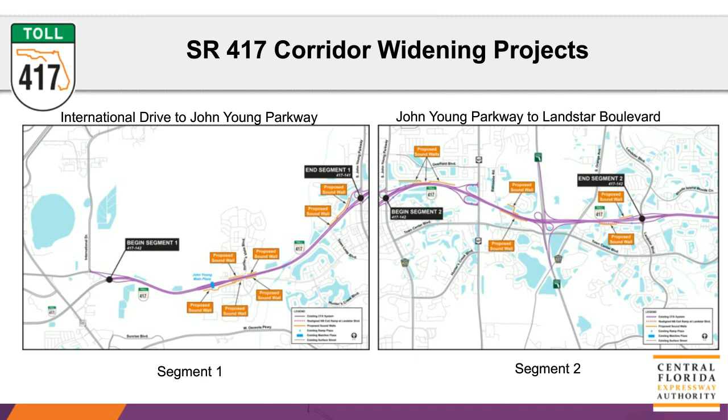Both segments include widening State Road 417 from 2 lanes to 3 lanes in each direction. CFX is also adding wider median shoulders that can temporarily accommodate additional traffic during emergency response events, such as traffic accidents or hurricane evacuations. Each segment also includes several proposed sound walls. During design, a noise study following state and federal guidelines is conducted to determine noise impacts associated with the expressway widening. The study identifies noise-sensitive sites such as homes, schools, churches, and recreational areas along the project corridor.

For these projects, sound walls have been considered for areas predicted to experience noise levels that reach or exceed 66 decibels, or experience an increase of 15 decibels over existing noise levels. Additionally, the sound wall must provide at least a 5 decibel reduction to be considered feasible. 66 decibels would be slightly louder than heavy traffic 300 feet away. 15 decibels compares to the noise you would hear at night in a rural area, like the sound of crickets. There is also consideration involving the cost per benefited property.

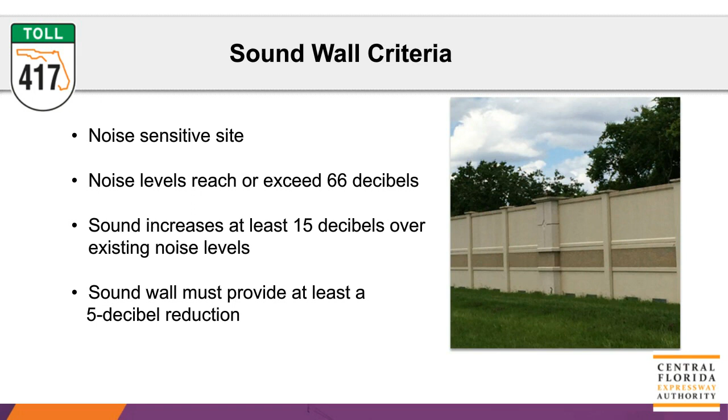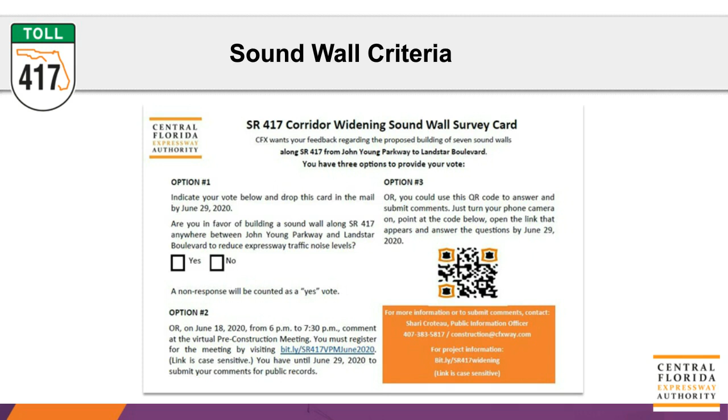We've posted the traffic noise analysis on the State Road 417 Corridor's Widening Project webpage. Please review it for details or contact us with questions. Now, let's review those proposed sound wall locations for the two widening segments.

Construction on the first segment from International Drive to John Young Parkway is expected to begin in early 2021 and is expected to be complete by late 2023. In addition to the widening, there are 7 proposed sound walls along this stretch of the expressway, as shown here by the orange boxes on the map.

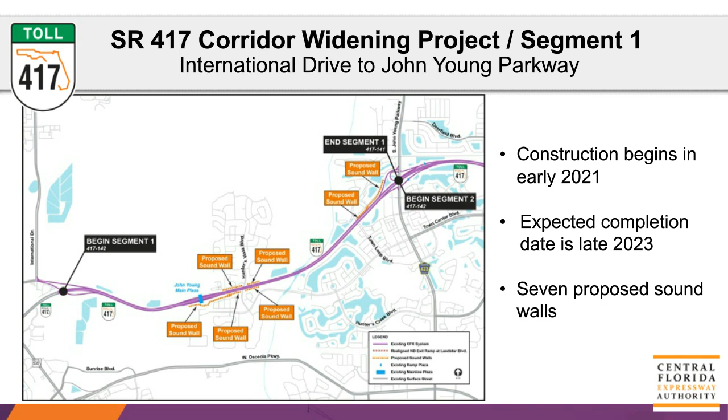This aerial map shows the sound walls proposed at Westshire of Hunters Creek. Wall A, a 22-foot tall wall along northbound State Road 417, would be located near the right-of-way line, behind the John Young Mainline Plaza. It runs a little more than 2,400 feet, nearly a half mile, behind the Westshire neighborhood. Wall B, also behind Westshire, is mounted on the shoulder. It runs 700 feet, or just over a tenth of a mile, to Hunters Vista Boulevard. This wall is 14 feet tall.

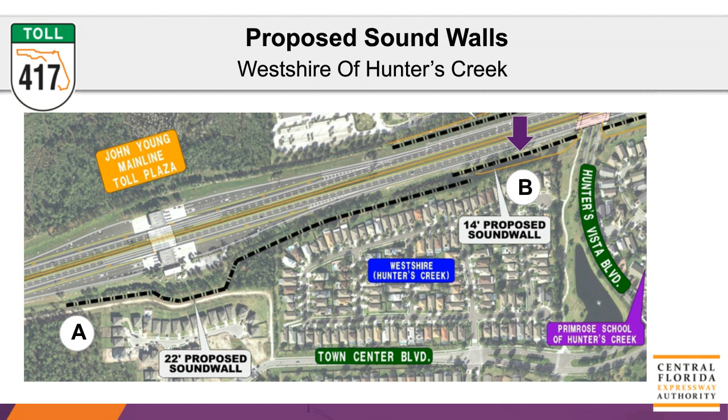This aerial view focuses on the proposed 14-foot tall wall shown at the top of this map. This is along the southbound side of State Road 417 near Terra Vista at Hunters Creek, just west of Hunters Vista Boulevard. This wall is mounted on the expressway shoulder and runs 995 feet, less than a quarter mile, to Hunters Vista Boulevard.

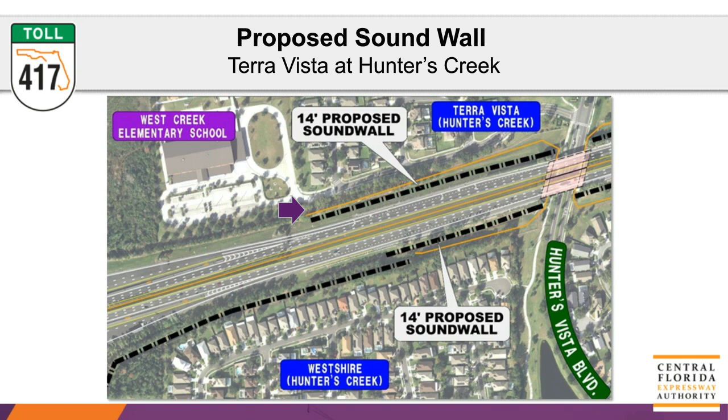This map takes a closer look at the sound walls proposed near the Hunters Creek neighborhoods east of Hunters Vista Boulevard. Wall A is a 14-foot tall wall behind Raintree at Hunters Creek. It runs 528 feet, or a tenth of a mile. Wall B, also 14 feet tall, is located behind Mar Vista at Hunters Creek along southbound State Road 417 east of Hunters Vista Boulevard. It's 739 feet long, a little more than a tenth of a mile. Both of these walls are mounted on the expressway shoulder.

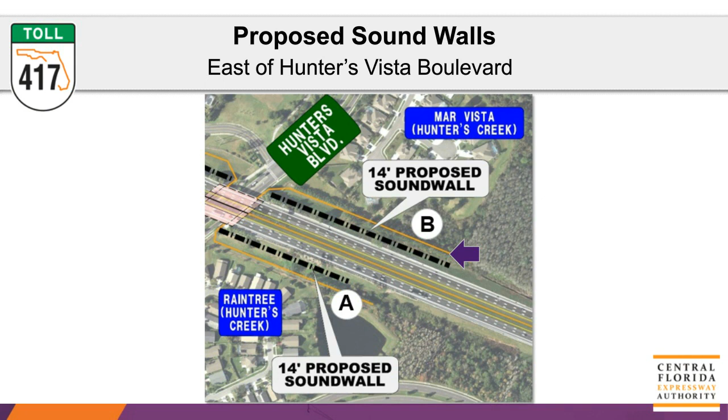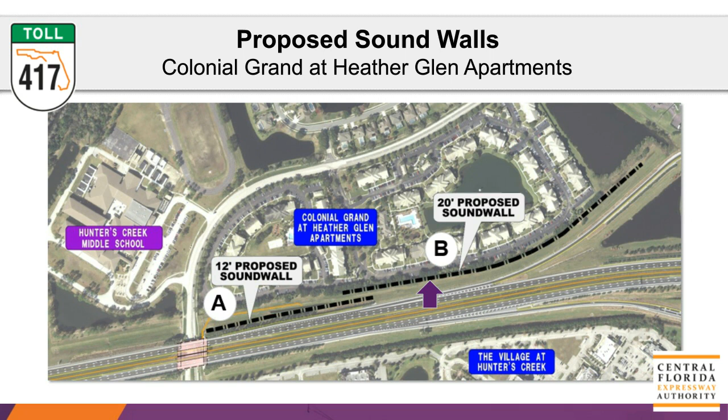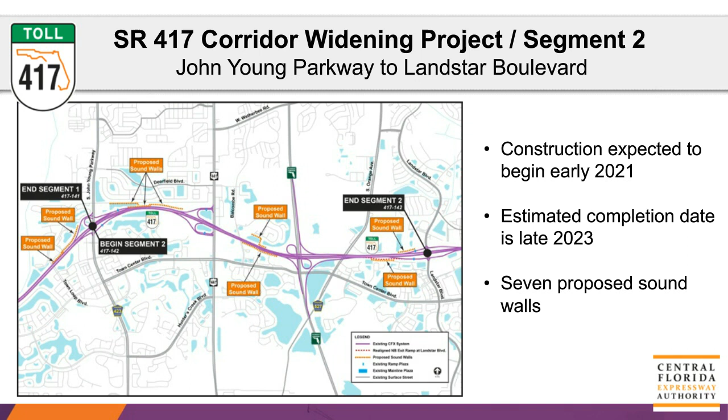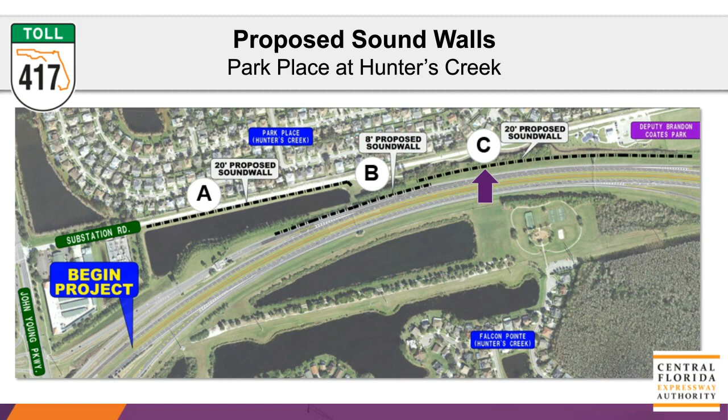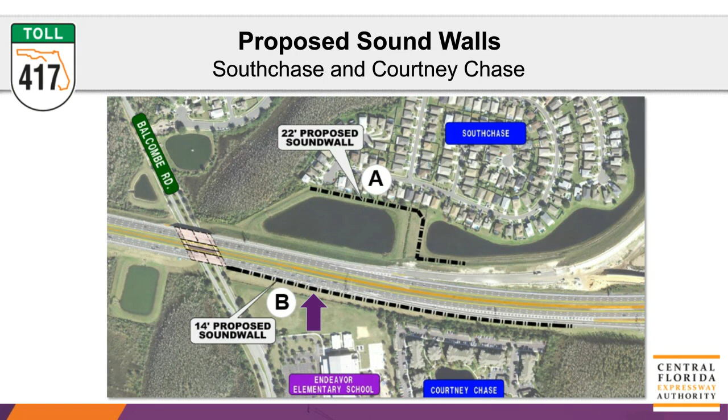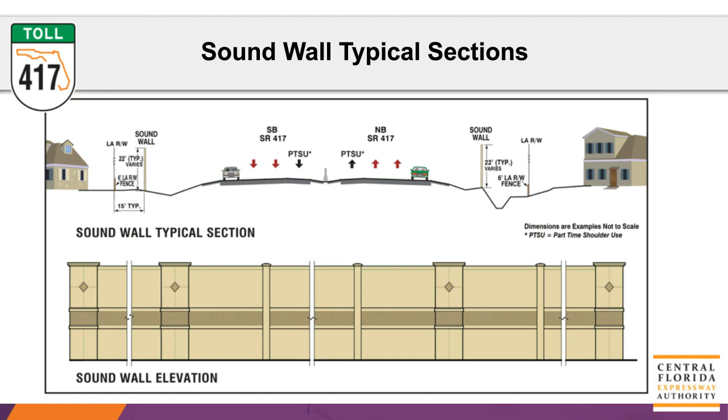What's driving that? Well, out there today we have 2 lanes in each direction, which was completed, I think, in the 1991, 92, 93 time frame. So it's been a little over 25 years since 417 was built. And yes, the growth in Central Florida, especially in this area, has meant a drastic increase in traffic on 417. Any regular driver of this expressway knows exactly what I'm talking about.

In fact, in the 5-year period prior to us beginning design, which was about a year and a half ago, we had traffic double in 5 years. Wow. And that is something that I've never seen. Most of the people I work with have never seen that.

So even with the slowdown in people out on the roads because of COVID-19, we know that traffic on 417 will continue to grow due to all the people moving to this area. And some say that's upwards of 1,500 people a week in the greater Central Florida region. So that's a lot of people.

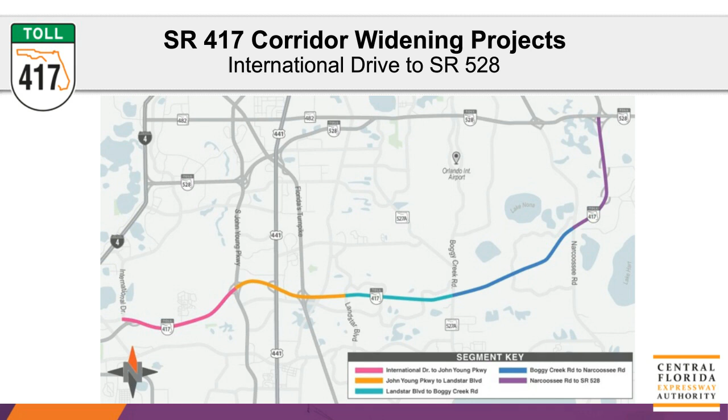So we thank everyone for joining us today for this. Expect to see by late 2023 easier flow through State Road 417 in these projects. Thank you very much.